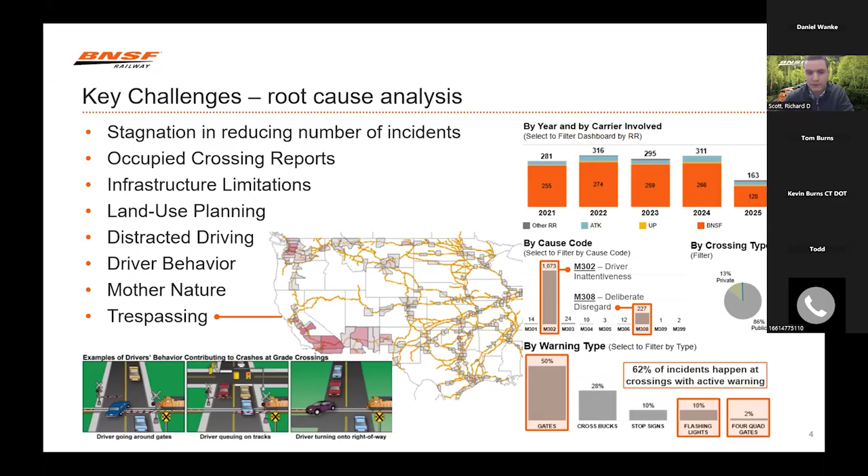Medians, for example, help combat drivers going around the gates. We know bollards between tracks have helped keep people from turning down the track at those challenging intersections. Our DOTs and road authorities are revisiting those locations to continue to improve and prevent incidents. So until we're able to solve for that and figure out how to enable drivers to make better decisions, we may continue to find ourselves on that plateau of incident reduction.

And hopefully the slide updated there. Just checking. Looks good. All right.

But where is the most need? So as I mentioned, we've got 25,000 at-grade crossings on BNSF in 5,000 plus communities. Where can our collective dollars go and to what projects to get the most out of our incident reduction, by total numbers in each state and by frequency per million BNSF train miles. So you can see the plateau there that I had talked about, and somewhat trending in the wrong direction here.

How does each state BNSF operates in reach that milestone goal of less than one incident per million train miles on that track to zero incidents? How are states using data effectively to pinpoint where partnership can go the furthest? Most states have a robust Vision Zero or Safe Systems Approach initiative, we've heard before, for roadway corridors and projects. Does that, as it should, extend to reducing incidents at those intersections where the road crosses the rail?

And what about the data that is not shown or is missing? Do state and local programs have the right overlap and proactive level planning effort to understand unique grade crossing challenges beyond what the FRA, the FHWA, or other dashboards could spit out?

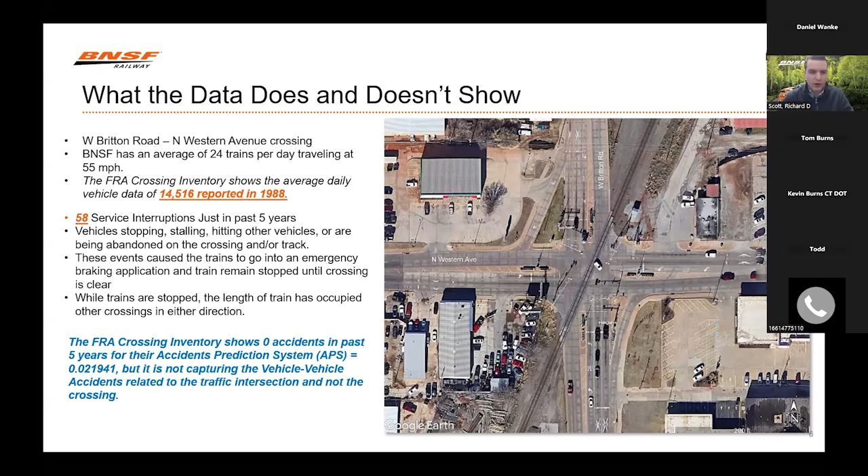There may be limited data indicating any of the crossings around here would have potential for incident or that existing crossing measures are not enough. But an in-tune DOT and community knows there would be emerging risk factors and engages with the railroad and developers on solutions to preemptively prevent incidents as the community grows through here.

So this is what BNSF sees as one of our key collective challenges and why we are seeing a rise in incidents and other crossing pain points. So with urban sprawl and incompatible land use mix next to established rail corridors and crossings, it's creating new conflict and incident locations. Schools are maybe the prime example here. So the cheapest land around is most often these industrial areas. So school districts on a budget are now too often selecting sites adjacent to rail corridors to build on.

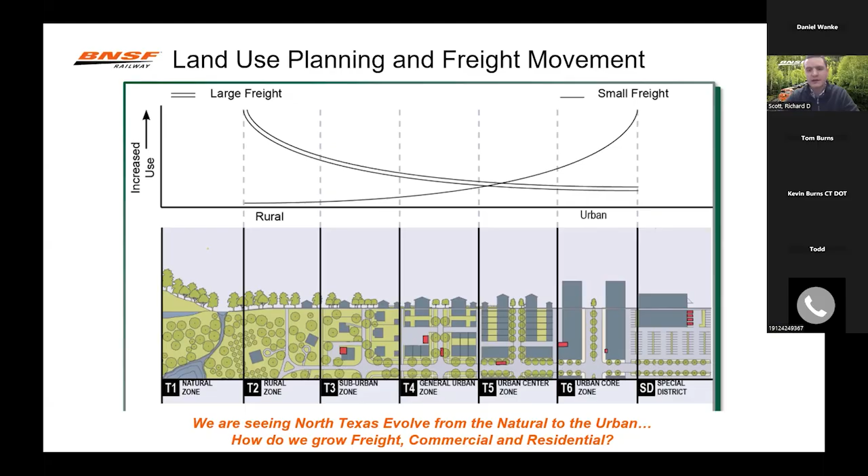So closing out this North Texas example, as the area has continued to develop and through partnerships, we've grown with the DOT, with local community leaders. We have projects in the works to now alleviate the challenges through crossing consolidation, through grade separation, before this area becomes even more congested. Finding better ways to coexist together, that's our mission.

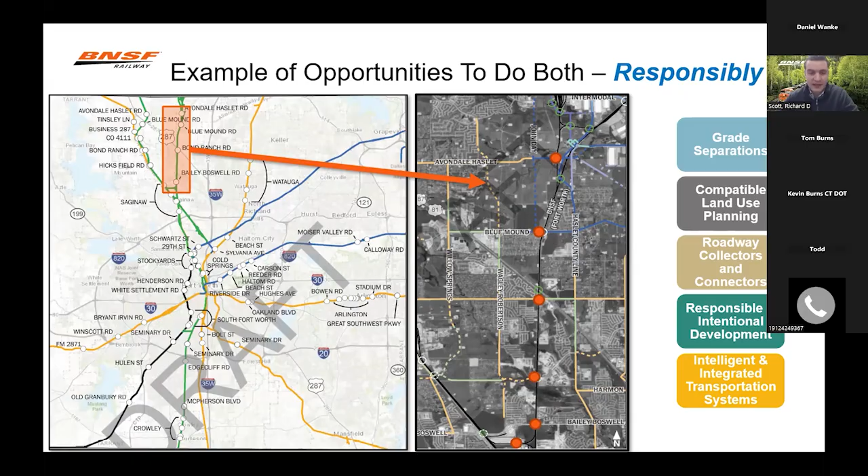But this is just one community now. How many other developments are popping up under the radar adjacent to, again, those 25,000 crossings in 5,000 plus communities on our system? It's overwhelming to think about here. So rather than eat the whole elephant at once, at BNSF, we started breaking it down this year into smaller parts and pieces and have been highlighting and putting some focus on a new theme each month here.

That long list of projects on all of our plates, each month is an opportunity to focus in a bit more on projects relevant to the theme here and give them renewed attention and double down on progress while thinking proactively for new opportunities, new projects that could be implemented. So this way, it's helped us make sure we are taking a well-rounded look at the mix of incident factors and how each theme could be adopted into a state rail plan, say.

So trespassing and vandalism might be front and center in California and Washington, for example. We want to make sure we don't forget to look for those kind of mitigation projects, those opportunities in, say, North Dakota and Iowa as well. So this approach has helped to spotlight some of those formerly less explored areas in certain states and align better with FRA focus areas across our entire system.

So wanting our state DOT partners on track in that sort of advanced planning effort, we launched what we call the BNSF Tracking to Zero award last year to recognize those states with less than one grade crossing incident per million BNSF train miles in the state. So in year two now, Illinois and Wisconsin notched their first awards this past summer.

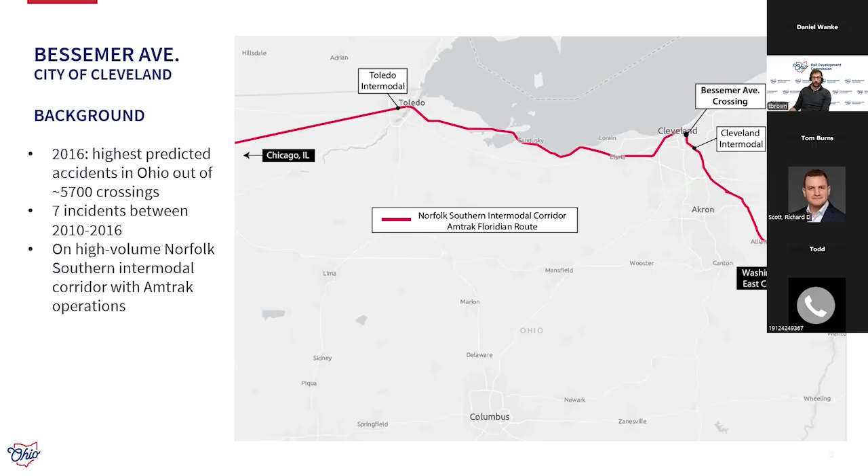So just some basic orientation. I'm down here in Columbus. This is Cleveland, Lake Erie. And this is Norfolk Southern. This is the then Capital Limited, now Floridian route. And this is a major kind of high density corridor for Norfolk Southern. There are a few intermodal terminals along the route, kind of connecting the East Coast ports with Chicago. So a little closer, zoom in to the crossing we're talking about. So this is in the city of Cleveland. A lot of adjacent industrial uses, heavy industrial. Norfolk Southern's operations, about 50 trains a day, with two Amtrak trains a day. In Ohio, they mostly operate at night.

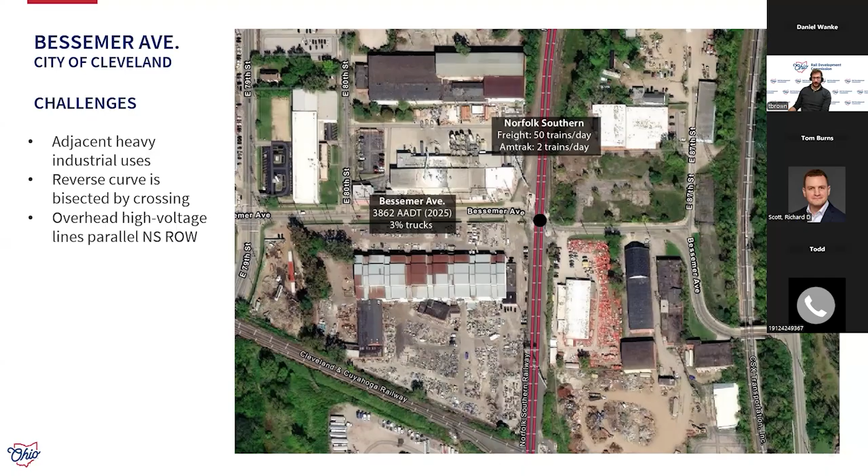Now, roadway geometrics, it's kind of hard to tell here. It looks a little gentler than it actually is, but the crossing is in a reverse curve, bisected by the railroad tracks. And there's just a lot going on in the area. There's overhead high voltage lines, decent amount of truck traffic, and really just kind of setting the stage.

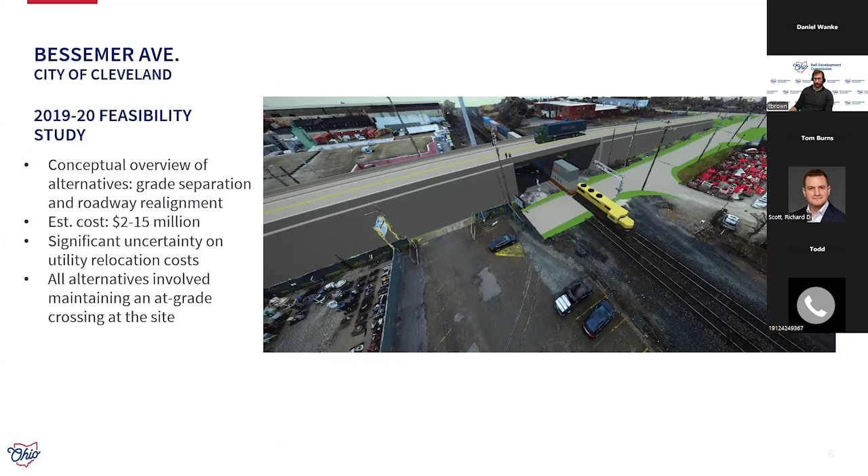So that is kind of the segue into our big takeaways, at least for the purposes of Bessemer Avenue. So crashes did continue following the upgrade in 2018, but there haven't been any since 2023. So that's good. The other is that the grade separation could provide safety benefits. You take a lot of the traffic away from that at-grade crossing. That's a good thing, but it wouldn't result in a crossing being eliminated.

And at least as it stands now, kind of federal funding outlook, that's an important selection criteria for the primary discretionary grant program for grade separation projects. So that was really the big limitation of the, I would say, final disposition, let's say, for that project.

So I guess fast forward to 2022, and we're looking at another crossing. This one is McCracken Road, the city of Garfield Heights. This map may look pretty familiar, and that's because it's exactly the same, except the crossing is directly outside that Cleveland Intermodal facility that's operated by Norfolk Southern. So 5 incidents since 2020. Again, on the same intermodal corridor with the same Amtrak operations.

The added complication is that it's not just Norfolk Southern. There is actually another railroad operating here. So we have our 2 Norfolk Southern tracks. We have the intermodal facility to the south, and then we have the Wheeling and Lake Erie Railway, a Class 2 railroad in Ohio, operating on separate right of way, but under the same DOT number.

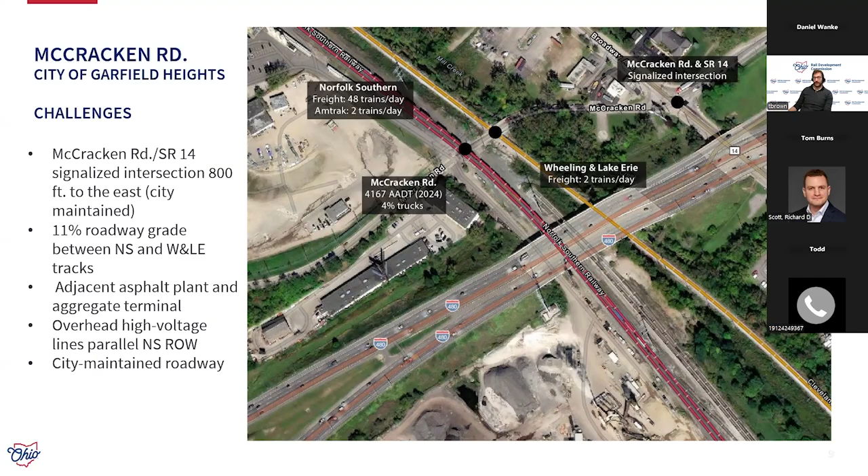Now, in the other direction, we also have this asphalt plant and an aggregate terminal kind of to the north and south that are served by driveways on the west side of the crossing. And we have the same overhead high voltage lines that were at Bessemer Avenue at this crossing. So a little clearer view here.

This was the other major complication, is that we have trucks going westbound on McCracken Road, turning into this asphalt plant. And it may be a little hard to see from the street view here, but they're either faced with stopping on the Wheeling tracks, stopping on an 11% grade, or stopping on the Norfolk Southern tracks in order to turn left into the asphalt plant driveway. So as a result of our 2022 diagnostic survey, there was some further investigation that the team recommended.

One, potentially to address that queuing that I mentioned from that signal to the east. Well, these warning devices aren't interconnected now. Maybe a preemption style project would help address that. Now, that still leaves this driveway. So what do we need to do there? Well, maybe a new signal at that driveway would help at least allow vehicles to clear the tracks, or even hold them short of the crossing if they're trying to turn left into that asphalt plant driveway. So

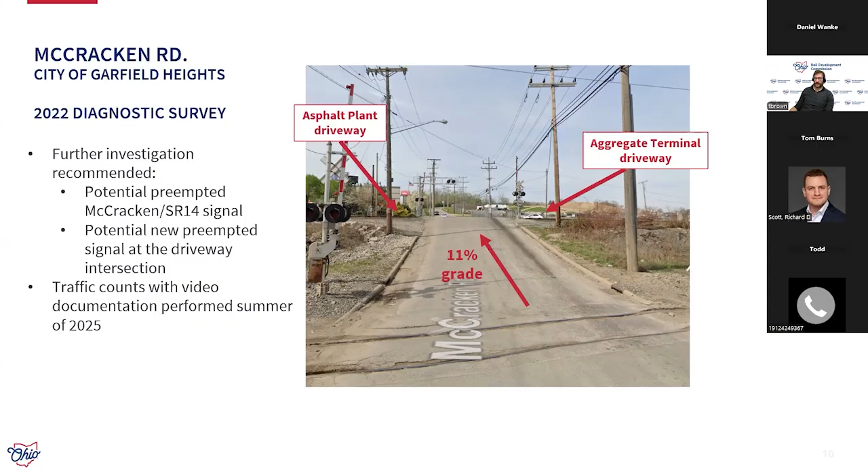In 2025, we had traffic counts performed with some video documentation, and really what that effort did is just give us more evidence. So just some screenshots from the video. This is the queue formation from that signal at State Route 14. Backing up in this case, it's probably well more than 800 feet, probably more like 1,000. And then you can see here on this other image,

I believe we actually have some troubleshooting of a down gate right here by railroad employees, but we also have trucks turning out of that driveway left, and then another truck that's approaching the crossing, waiting to turn left. So this is really what we're faced with. I mean, this is challenging from a design standpoint. So we have some conceptual designs worked up, but

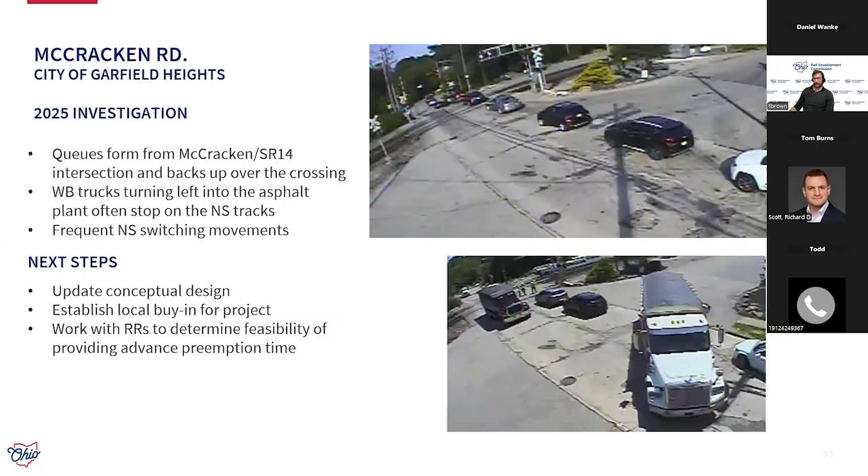the potential challenge is that, I mean, we're the Rail Commission. We're an independent commission with the State Department of Transportation here in Ohio, and this is a locally maintained roadway. So a lot of this potential project is predicated on getting that buy-in early. So that's one of our major next steps. Another is to work with both railroads to determine the feasibility of providing any advanced preemption time, if it's even possible.

So major takeaways here. Like Rich said, grade separations can be a really good solution to these challenging issues. This has some similar challenges to Bessemer Avenue, significant unknowns with utility relocation costs. The grade elevation, it's kind of hard to see from the imagery provided, but that would also be a major challenge. And similar to Bessemer Avenue, maintaining the adjacent property access. We have two heavy truck users who would still require property access, should a grade separation project be initiated.

So eliminating that crossing may not be feasible here. So other engineering approaches, signal preemption, based on our initial view, those could provide some important safety benefits, but there are some caveats. And the big one is that as the Section 130 program for Ohio, we can cover design and construction costs, and that's really part of our role.

But ultimately, getting that local buy-in, meeting on where our safety priorities are with the local highway authority, and getting that project advanced, it absolutely needs local buy-in, because ultimately we're relying on our local highway authorities to maintain these interconnected signals, so they provide the safety benefits in the future. So that's my presentation, and happy to take any questions at the end.

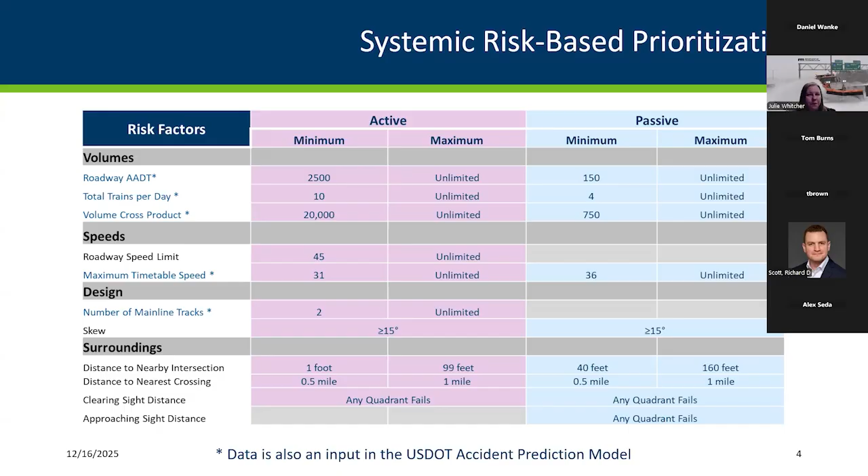And another thing that we had to do when I first came to this office was set the program priorities. And based on this risk-based system, we put together a group of individuals, I believe we had railroad representation, I think we had a township member, and just a smattering cross-section of our cohorts who were available to give us input and help us come up with these program priorities.

So we do take a little bit off the top of our $6 million that we get annually in Section 130 funds for inventory, and we had a one-time expenditure for the statewide action plan. But then consolidation of crossings and crossing closures really is our number one priority.

We have not really spent a lot of Section 130 funds on closures, simply because the nature of a closure moves faster than our programming does. So we need to program those projects up to 3 to 4 years in advance. And when the time is right for a crossing closure, we like to strike faster than that. So a lot of times we'll utilize some other discretionary funding that we have available, partnering with the railroads to make those closures happen. But we do still have it as one of our top priorities, and we're always working to find opportunities to close crossings.

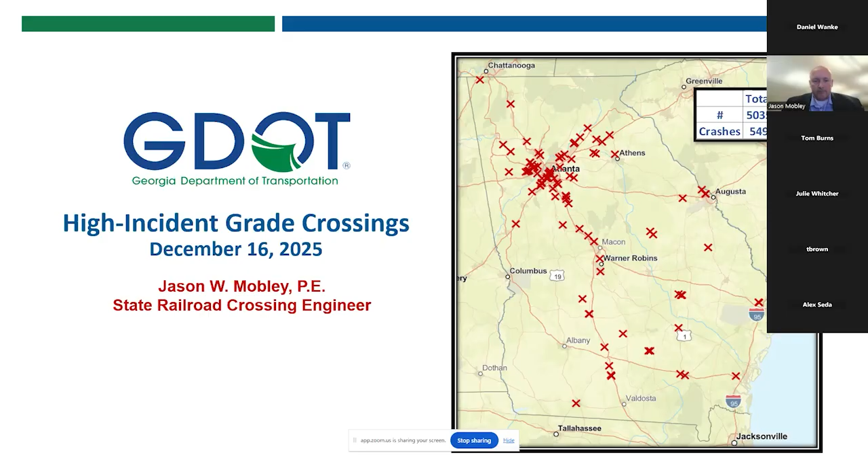Let's see. All right, did my slide advance for you guys? Yep, looks good. All right, good deal.

And I'm always kind of amazed at how ours mimics the nationwide trend. So I just wanted to put this out there to know that we are in the same boat almost everybody else is. I was glad to see Julie's downward trend continuing, and I'd like to see Georgia's start doing that again as well.

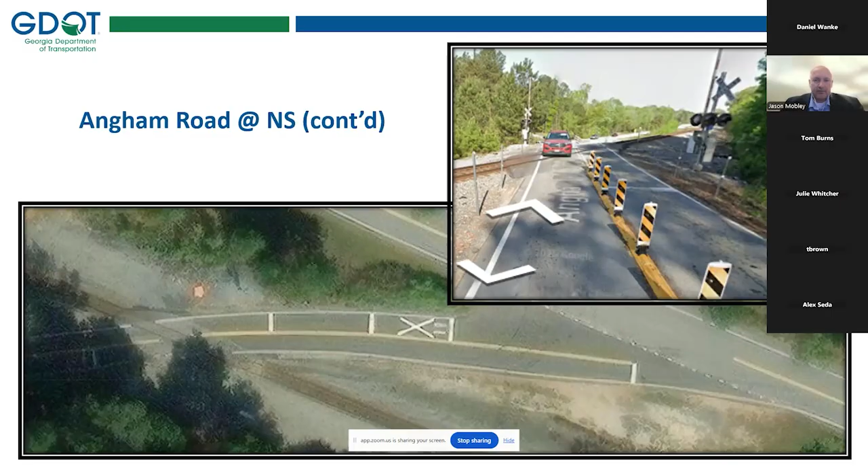But we're getting reports from Norfolk Southern that they're still seeing some drivers turning onto the tracks. I'm going to go ahead and advance the slide to show you a little bit of a zoomed out view of this area. Here's the crossing we were just talking about. We've worked with the city of Powder Springs and Cobb County and Norfolk Southern, and the city of Powder Springs has applied for an RCE grant and was awarded an RCE grant to eliminate this crossing.

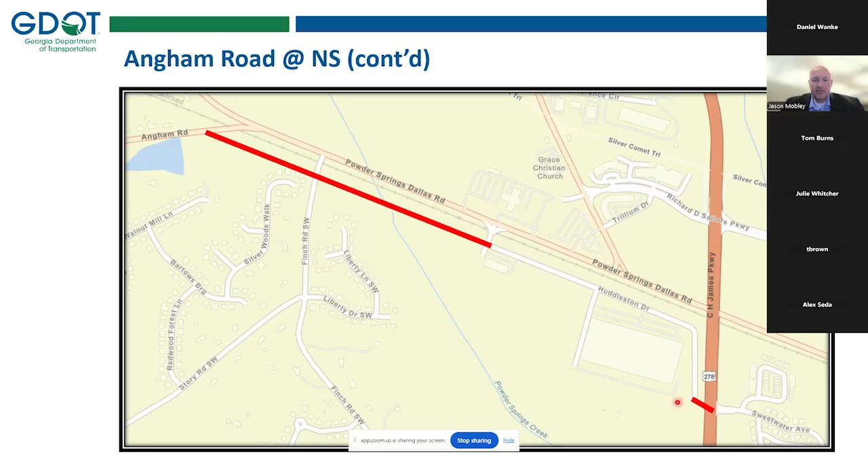And the scope of the project is to eliminate the Angham Road crossing, as well as the downstream crossing at Finch Road and the downstream crossing at Huddleston Drive, by building a connector road, and then also connecting Huddleston Drive to Sweetwater Avenue at US 278, which has an existing grade separation. So that's the preliminary scope. The good news is this will eliminate these 3 crossings, which are all on our multi-crash list. So I'm very excited about this initiative, and we are participating as much as we can to help the team. And I'll move on to the next one.

So Rugby Avenue is one where we noted crashes occurring within days of each other. We decided to investigate this one quickly because of the crashes occurring so rapidly. And from the initial reports, we felt that there was a problem with preemption somehow. So we coordinated a field test with CSX and the city. During the preemption simulation, we realized that the westbound drivers that should be getting track clearance green were actually getting red, and they were being trapped on the crossing. And then the eastbound drivers, which should have been getting red, were getting green, inviting them onto the tracks. So the signal phases had gotten swapped somehow.

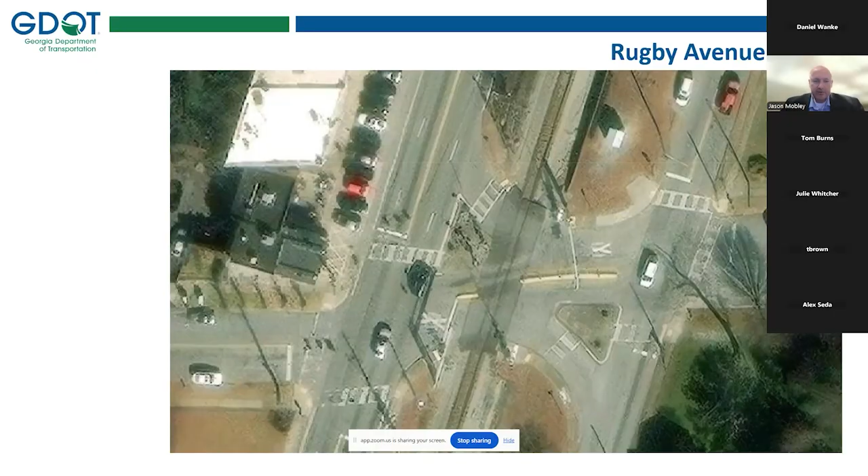And we stayed out there and got the signal crews to come and make the change that day while we were out there. And there have been no crashes since. And this is one that really affected me as an engineer in my career, because I felt like we really saved lives that day by something simple, just taking action after seeing some trends and getting out there and finding a quick solution that was very effective, and just a very gratifying day in my career. I think about it a lot, and I know probably a lot of you have experienced something like that in your careers, or maybe more than that.

So the next one is another one of our top concerns, Oak and Gloucester Road at CSX. The concern is not necessarily with the crossing itself, but it's the roadway geometry leading up to the crossing. So coming from the south, drivers have a long straightaway and they build up a good bit of speed, and usually are driving faster than the posted speed limit. And there's a sharp curve right before the crossing, and they usually misjudge this curve, and they either wipe out the railroad signal, or they land on the tracks and get stuck. And this is a pretty active line, so there's been numerous crashes here.

Another contributing factor is that there's a large commercial driveway that's in the curve, and a lot of trucks are in and out of it all the time, so reducing the access is not very favorable at this location. We've worked with the county to implement several short-term improvements, such as adding chevrons, more enhanced warning signs, and speed warning signs that show the speed you're driving. But the long-term solution is eliminating the crossing. The county applied for and won an RCE grant to do this, and they are currently scoping the solution right now. We're engaging with the county to keep up with the status of this project and to provide support where we can.